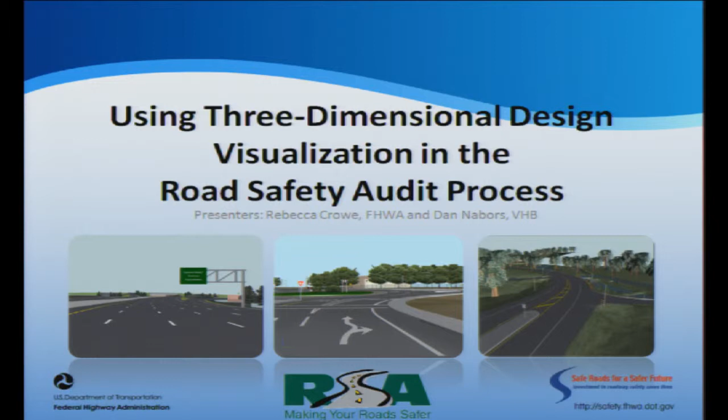So let me tell you what we're going to go over. We're going to talk about the background and purpose of this FHWA-sponsored project, what we mean when we talk about RSAs, and the 3D techniques we used on this project to make it accessible to this multidisciplinary team, which Becky's going to talk about. We'll go through a demonstration of one of the projects, then talk about the different case studies, what was learned, and what were the conclusions.

So now, without further ado, I'll turn it over to Becky, who's going to talk about some of the background information. Becky.

So I've been on vacation for the past week. We went down to Disney World in Florida. I was back one day, and I was talking to my mom. My mom's getting ready to get her Social Security for the first time. She's turning 68, she's so excited. She's like, we've got to go to dinner and celebrate my Social Security check. I said, well, Mom, I can't, I'm getting ready to leave for California. She said, oh, what are you going to be doing out there? So I told her about the presentation, and she chuckled and laughed and said, oh my gosh, I can't believe you're talking about technology. Do you remember blah, blah, blah?

Just to give you a quick story, my mom was really a pioneer in terms of a woman being in programming. Right out of college, she did an internship with IBM, started working for IBM, and eventually owned her own consulting firm working with different agencies in Virginia doing programming work. She was the type of person who had an office in our basement and would program all night - you'd just slide the food underneath the door. She always had long nails. But she just loved it, still loves it - she's still in information technology today.

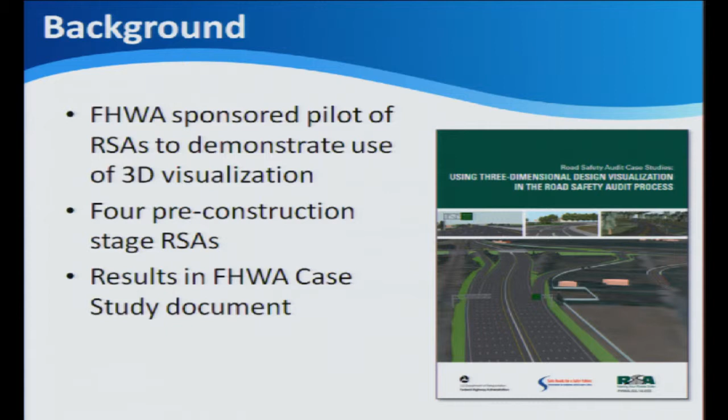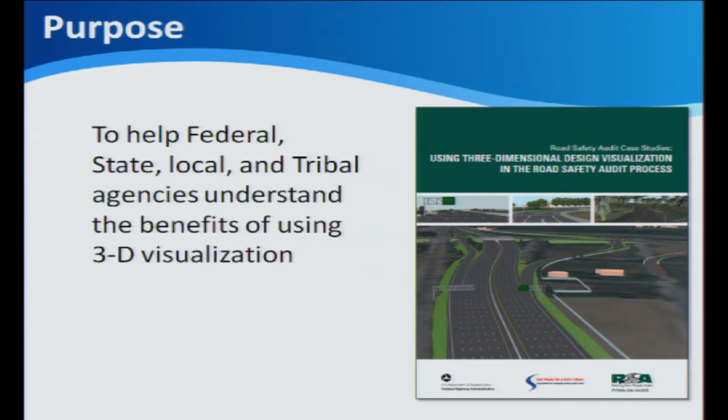And why did we do it? We want to help other agencies, other DOTs, other federal agencies, tribal agencies learn from this. We wanted to capture all of these RSAs, what we learned from using this 3D visualization, with the hopes that they're going to be able to take this technology and use it as well.

Why 3D visualization? You all have heard this, I heard it yesterday a couple times in presentations. In the current transportation legislation, there was some discussion about innovative technologies, Section 1304, 1503, and our Every Day Counts initiative spearheaded by our Administrator Mendez, and our SHRP2 initiative, our research project. They're really pushing state DOTs to look at how they can better use technology to do their work.

So why 3D visualization? I gave you a hint earlier. We want people going out and looking at a design to really understand what's in that design. Sometimes when you're looking at static plan sheets - I'm from Virginia, and we just got finished up on the Woodrow Wilson Bridge, and there's a whole room dedicated to plans, huge rolls of plans. I can't imagine having a team going through those plans and trying to determine the safety of that project. So this is just a tool that we wanted to use to really give us that awareness of safety on a project.

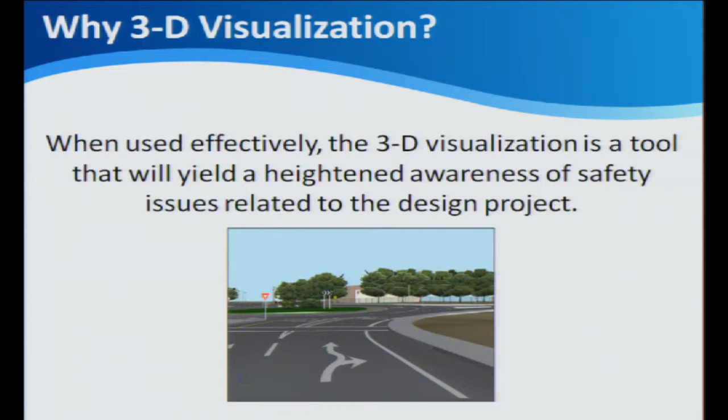So before we get into the glamorous part, I'm sorry, we have to talk about road safety audits. I know the visualization stuff is more fun, but before we go there, look at this picture. How many times have you been riding down the road, you see the blue lights flashing, and then you come up on a crash and see something devastating, like this picture.

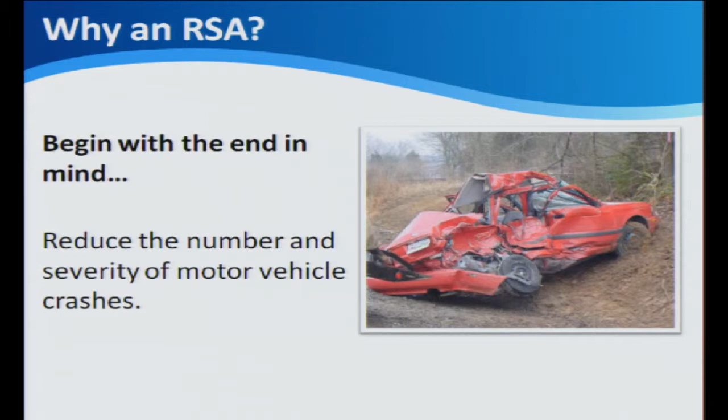Let's begin with the end in mind - we want to reduce these. The saddest crash I've ever seen: we were on our way to the beach, headed down 95, and it was a Tahoe. It looked like it had flipped 4 or 5 times, people had been thrown from the vehicle, and their dog had been thrown from the vehicle. It sticks out in my mind, I'll never forget that. This is why I'm in the business I'm in - I don't want to see that, I don't want to see these crashes on the road. So whatever technology, whatever process we can implement to stop these crashes, I am all for it.

We want independence - people on our team that aren't very familiar with the project, to give us a fresh viewpoint. What do you see when you look at this? A lot of times if you're engaged with that project on a day-to-day basis, you're not going to see things that someone coming in fresh is going to see. So we want that independence, and then we want a multidisciplinary team: law enforcement, because they see what's going on the roadway; someone with a human factors background, who can see things that engineers and planners might not necessarily see; and we want operations folks out there.

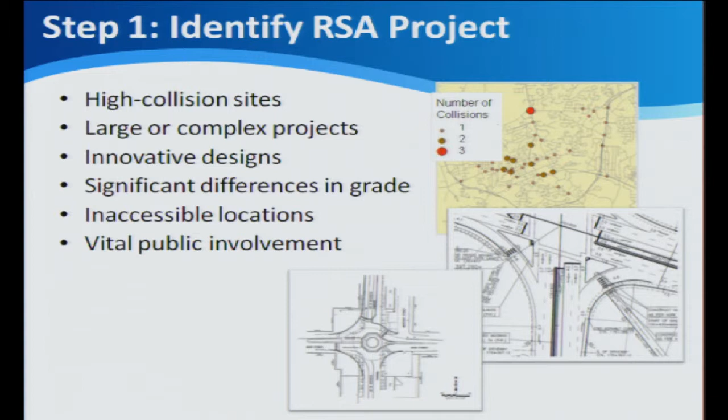So first, you have to identify that RSA project. And as I said earlier, it could be any project. Typically, we like to see maybe a complex design, or maybe a roadway where its function has changed, so there are different things now happening on the roadway. Maybe it's a location that's inaccessible, you can't actually go out and walk it. That might be a great candidate. Or an innovative design—you're going to be hearing about an innovative design later today. So these are the types of projects that we would look for.

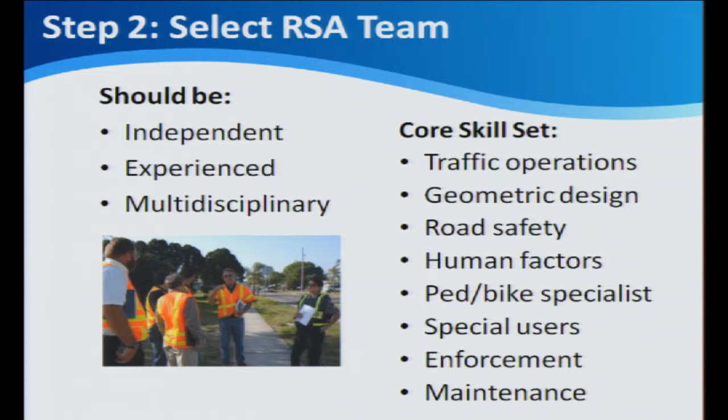And then selecting that RSA team, to me, this is probably the most critical step. I talked a little bit earlier about that multidisciplinary aspect. You want that core skill set to be geometrics, engineering, human factors. You may have an area that has a lot of pedestrians and bicyclists, so you might want that skill set on your team. So it is imperative that you get the right people on your team to actually be reviewing your project.

Step 4, even when it's a design, we want to go out into the field and see what's going on out there. Some of these designs, we weren't making a lot of changes. Some of these were a complete redesign of the roadway. But you want to do the field review. It's extremely important. You want to see the conditions.

You want to see how traffic's moving. It's great to have law enforcement out there with you, especially if it's a very complex design. They're sitting there beside you saying, well, how am I going to pull anybody over on this? Or you've got traffic signals that don't make any sense—I can't go to court and defend this. So they bring a really unique perspective when you're out there on the field.

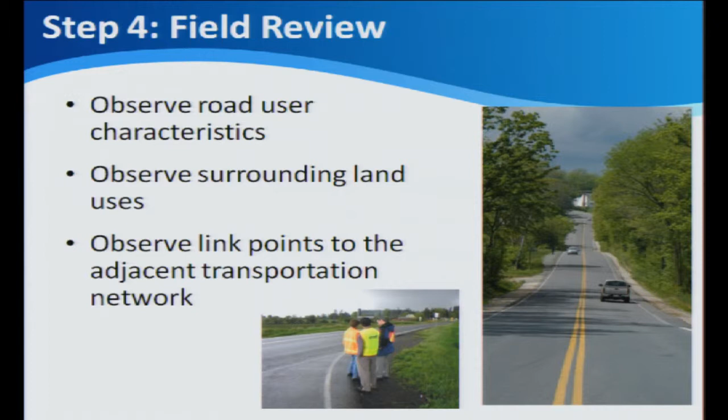And then that step 5, this is really when you're going to start doing your analysis. You're going to be sitting across the table with your team, and you've got all this data in front of you, and you've been out in the field, and this is really when you're going to start working together and talking about, this didn't look right to me, this didn't feel right to me, what do you think about this characteristic of the roadway, how are people gonna really understand what to do. So this is where you're going to start doing that analysis, identifying the issues, prioritizing those, and start to think about what types of countermeasures should we really recommend to make this design safer.

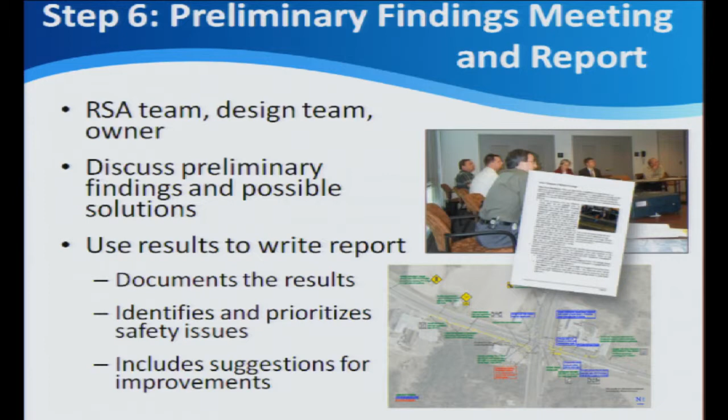And then this step 6, this is where you start writing the report. You've done that analysis, you've come to some consensus of what you'd like to see changed. And like I said earlier, it's formal. You want to actually write a report and get everyone's comments and input. Here's your formal response that you're going to actually be sending to that road owner.

And then finally, the road owner is going to give you that response back as to which of those issues maybe they can move forward with, maybe those issues that they can't move forward with due to funding or other reasons.

And then, this is the final step. We want to see those things incorporated into the design. And on every RSA that I've ever been on, it's amazing how when you have operations folks out there and they see something wrong, they're on the phone immediately. You don't even have to wait till this, your formal response back to the road owner or incorporating.

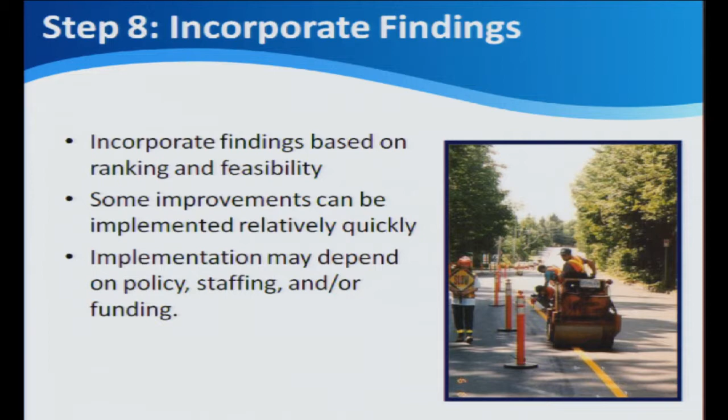They're out there now getting signs changed, cutting brush down from the road to make sight distance better. It's amazing how quickly they work. But that gives you some idea of the 8 steps for an RSA.

I am going to now turn it over to Dan, and he gets to talk about the fun stuff. Thanks, Becky. So this is the fun part. Everybody should be excited, right?

So we're going to talk about the models that we developed for this project. First, I'll start by telling you what we put together. We were developing realistic models that had all the traffic control part of the proposed change, pavement markings, lane configurations. You could see all the attributes on the road and the roadside to give it a realistic feel.

The purpose of this was to be able to drive down the roadway and look at what it might look like if it was a completed project, to give this multidisciplinary team that sense of completion. It makes it easier for them to identify some of the challenges or potential things that might be of concern from a safety standpoint.

The other important point was that we put this in a format that was easily accessible, because we had these multidisciplinary teams and not everybody was well-versed in engineering drawings, shop drawings, or technical aspects of design. So we wanted to put this in PDF format, since the PDF software is available for free. We could send this to them or put it on a website so they could download it themselves and look through the different designs prior to going into the meeting.

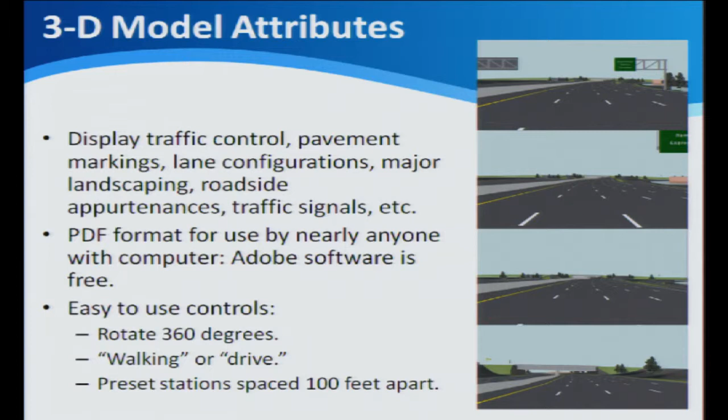And then finally, the last control feature was that we did this so we had preset stations, the stationing for the project. We followed that stationing so they could click directly to different stations if they wanted to look at a specific area. I'll demonstrate that for you in a few minutes.

So how did we put this information together? Well, first is displaying the information, really breaking it out, where we took the digital terrain models or 3D contours, if that's what we had, to really make the surfaces smooth and connected so we'd have separate layers for different surfaces for the road, the roadside, and different things, so they could be displayed and overlaid with different surface materials.

Next, we created 3D objects outside of our design software package, usually done in SketchUp or something similar. We created those and imported them into the design software and placed them in the appropriate location according to the design.

Then, after looking at the information we displayed, we would create the surface materials for the road, the grass, and different things like that. Then we set these 100-foot view locations — that's basically what we did. Finally, we would take that and create a 3D PDF from that design software. We usually used MicroStation for putting this all together.

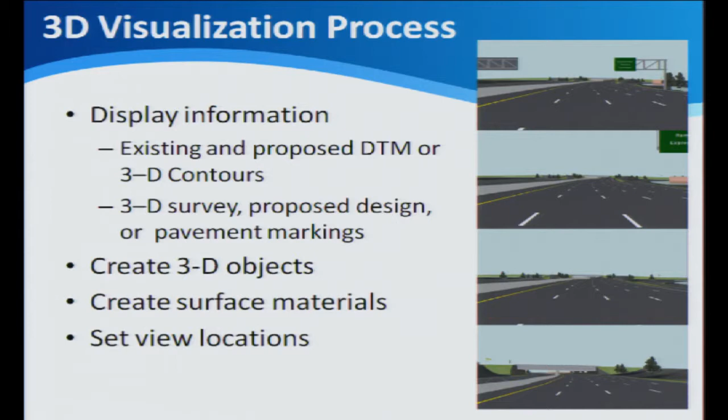So what does that look like? Now I'm going to show you one example of one of the roads we looked at. This is a case study in Virginia, and we'll go through this in more detail, but I want to show you how it works. We had these models developed with preset stations marked out, so you could click through and it simulates driving. You could also drive through using the mouse or the cursor.

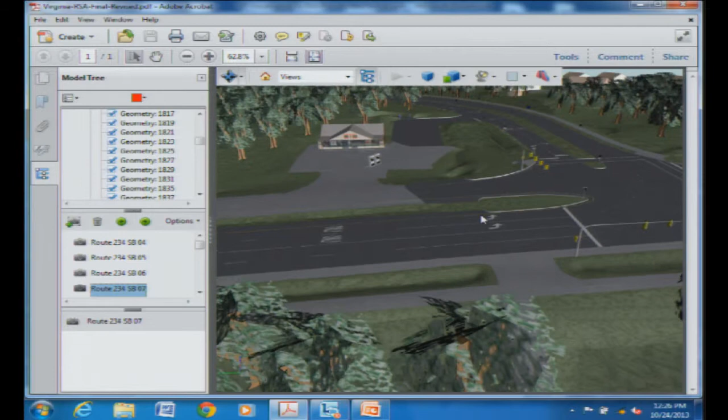You can also rotate, as you see, to look at things isometrically, getting a bird's eye view. You can zoom in there too, and you can see there's quite a bit of detail in a lot of these things.

Everybody recognize this? I know we're not putting a plug for a special convenience store or anything, but you might be able to recognize that as a 7-Eleven.

So we'd have some realistic features here, and part of having the realism is to get buy-in from people who are going to be reviewing the model and evaluating the safety aspects.

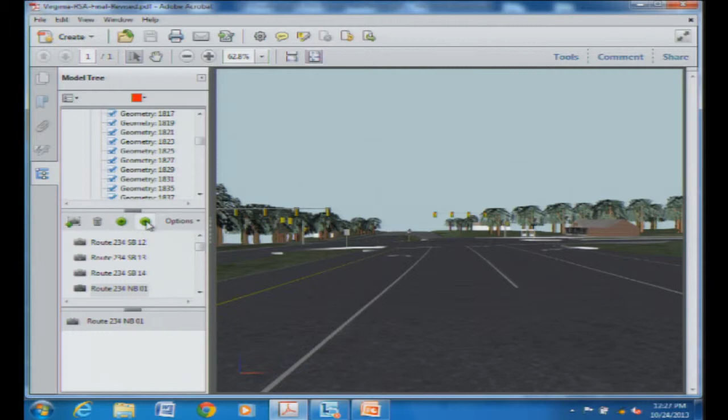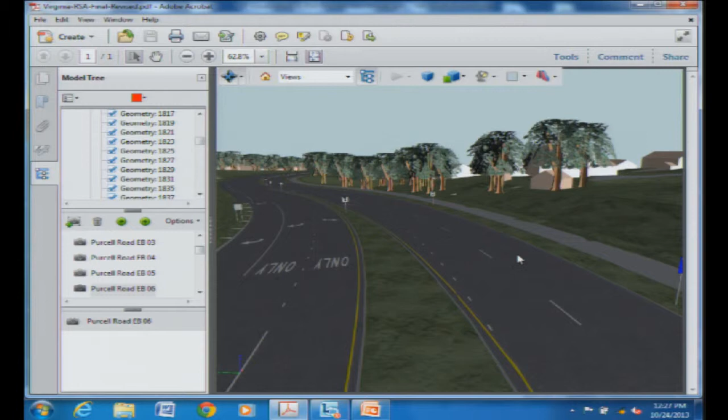This particular one of the concerns, which I'll talk about in more detail, was this new roadway, basically a widening and realignment. One concern was the impacts on this neighboring community. This really demonstrated to the public what the final design would look like and how that would affect their community.

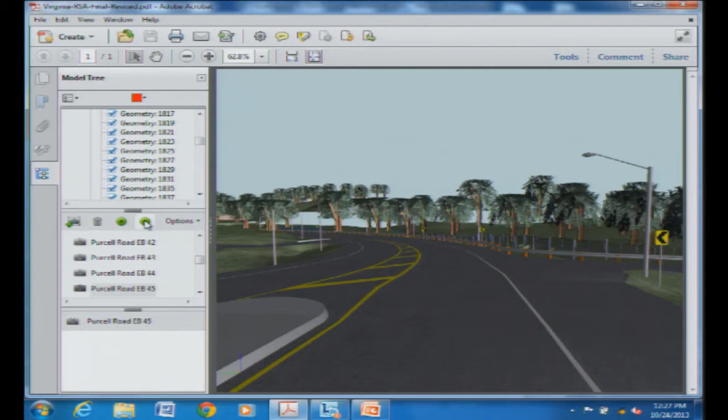But you can see signs are also displayed there, so we have the signing and marking plans put into the models—a pretty realistic depiction of what we're looking at. You see lighting through here, fences, and we also have retainment ponds for runoff. So again, we're depicting every single feature that's out on the roadway in a realistic fashion.

I'll just click through, going in each direction. By having these preset stations, it goes one direction and the other, so you can kind of see where you are, and you can click to it by just clicking on this menu off to the left. So that tells you exactly where we are.

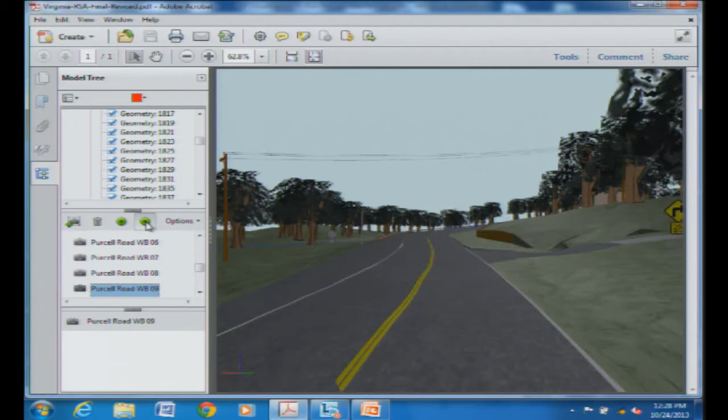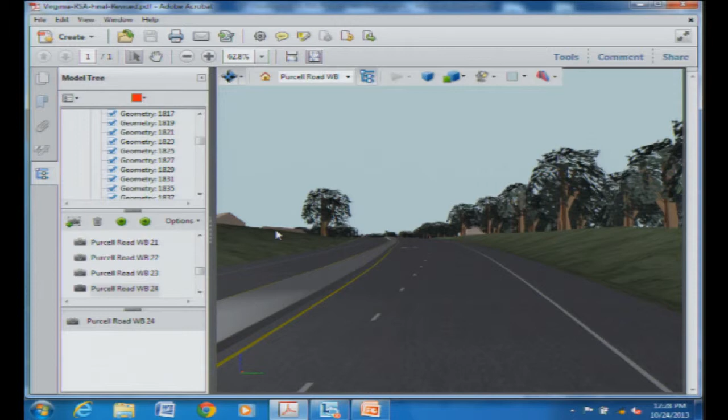But you can also see where the new and old roadway alignment difference is. When you have that fresh repaving, you get that darker asphalt color—that's in there too. And you can see retaining walls that were needed for the widening. That's all depicted, so it's pretty real. People bought into this because it depicted conditions they could expect if the project were complete.

All right, so let's continue talking about some of the case studies and how this was utilized. There are 4 case studies I'm going to go through, and we'll talk about some of the different benefits that the 3D model realized from each of these. The first one is Defense Highway, Burma Road in Middletown, Rhode Island, which Becky had referred to as well.

The planned improvements here are for a two-lane new facility that goes through a Navy base. Because of that, it's closed to the public, so we didn't have access to the area where the roadway was going to be proposed. This was a preliminary concept, so we didn't have a lot of detailed information available—no site survey or anything where we could develop digital terrain models.

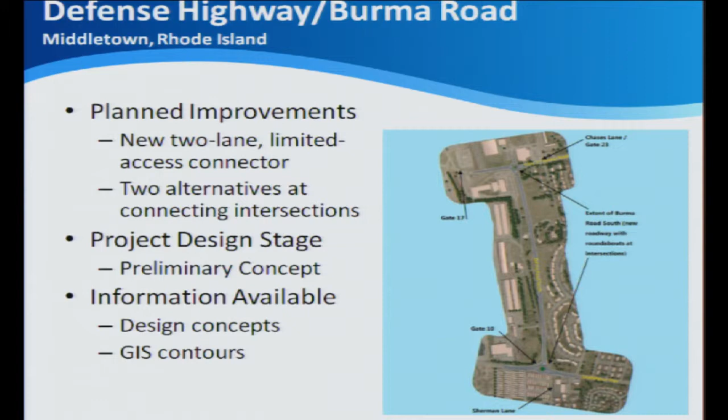So we had to use the state's GIS contour file to create that 3D element. As you can see, we overlaid the 3D model—you can see the extents in this aerial view from this roundabout to that roundabout—on a map of the base using the GIS contours and existing aerial photography. We only looked at one section, and within that section there were actually a couple design alternatives for some of the intersections, which I'll talk about more. But this one section was just the part on the base that we didn't have access to.

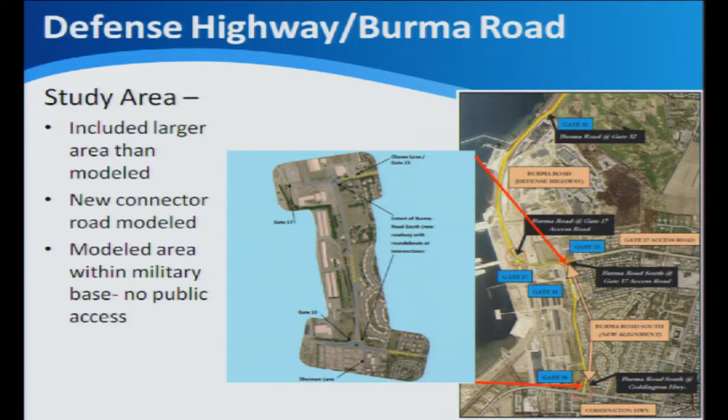The RSA was much larger, and it was interesting because it gave us a basis to compare—looking at the model, using the model, versus the area where we didn't use the model. But in this case, it was a necessity to use that model because we didn't really have access.

So what were some of the benefits of using that on this facility? Well, one was just having that visualization of what the road would look like on that base. That was important because of the impacts to the base—they were going through a partial base closure, and they wanted to know, if they turned this section over to the public as a public road, what would be the impacts to their land and their operations, including the different gates they have going in and out of the base.

It enabled comparison of those impacts. Like I mentioned, we had two design concepts. On the left you can see a visualization of having that connector road terminate at two signalized intersections. The other concept was having it terminate in two roundabout designs.

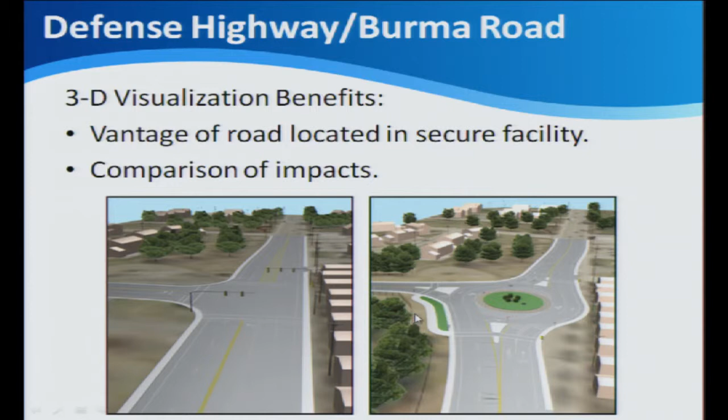By having this detailed 3D visualization, you could see not only from a plan view, but from a real-world 3D view what the impacts were to this housing area, in all quadrants, and also some of the trees used to help shield the developments and the base itself. You can see the fence depicted on this view with the roundabout as well. So what were the impacts to the base?

Some of the other things were visualizations of concepts that were pretty unfamiliar to a lot of people in this area, particularly with regard to being so close to a naval base. One of those was the use of roundabouts.

In these two bottom photos you get a nice isometric view on the bottom left, but then we were able to drive through that roundabout and show some of the key attributes that would be an added safety benefit. The specific attribute we're trying to demonstrate is deflection through a roundabout, which helps slow down vehicles. Speeds were a big concern here, so that roundabout idea was seen as a good benefit because it would address that specific issue.

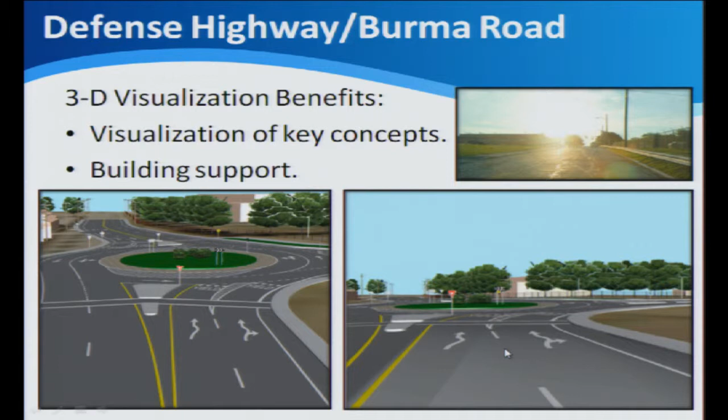Here's a photo of driving down the existing road, and you see the sun comes up right along that roadway. One benefit of roundabouts, which you could really visualize through this 3D model, is that you have your pavement markings on the road. If this were a signal, you'd have difficulty seeing the indications due to the sun coming up at that time. By demonstrating the 3D model on the roundabout, you're looking down on the road and you have your pavement markings there, so you're less likely to be confused coming into that intersection. It really brought some of those things to life.

Ultimately, Rhode Island DOT developed a policy through other connecting corridors of putting in these roundabouts in pairs to form this dog bone formation, with two roundabouts that help slow down vehicles, but also help with vehicle access. If you have access points between the two roundabouts, you can put in medians, which provides an opportunity for an access management plan.

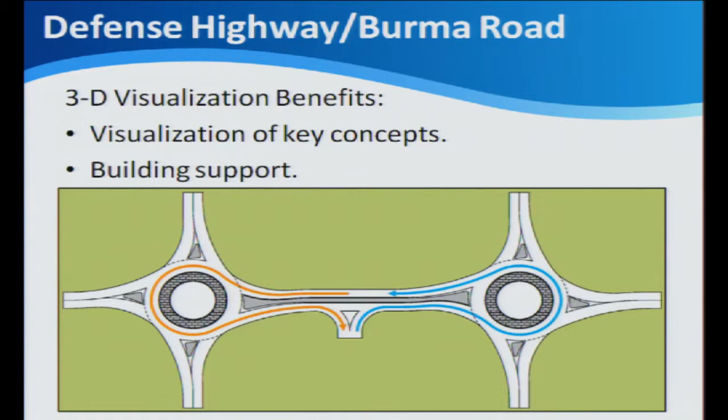Building support through being able to clearly demonstrate these models was one of the key benefits. By doing that in 3D PDF format, it was very easy to transfer to multiple stakeholders, which we have on a lot of these projects.

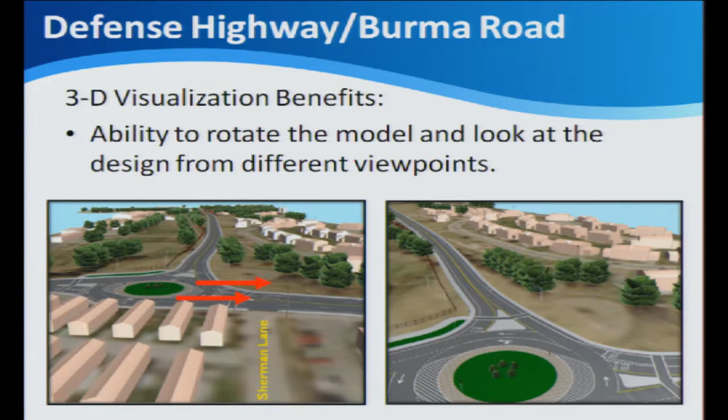Looking at things from that isometric view just gives you better vision and clarity of some of the impacts. Through that, a design recommendation was made to move this roundabout to this side street to make a 4-leg roundabout rather than keeping it where it was originally proposed. Again, this really helps clarify the impacts of different decisions with a specific design.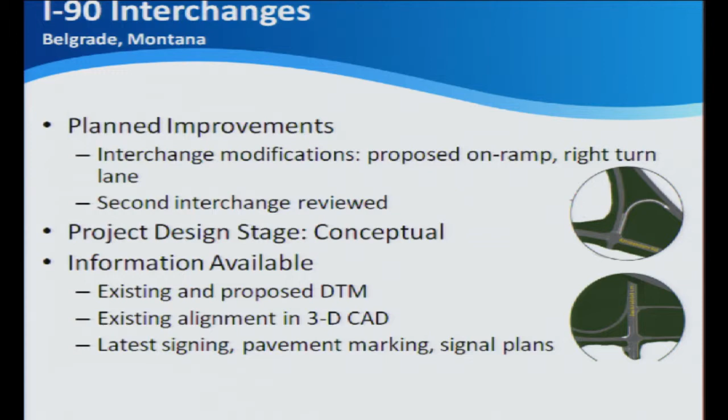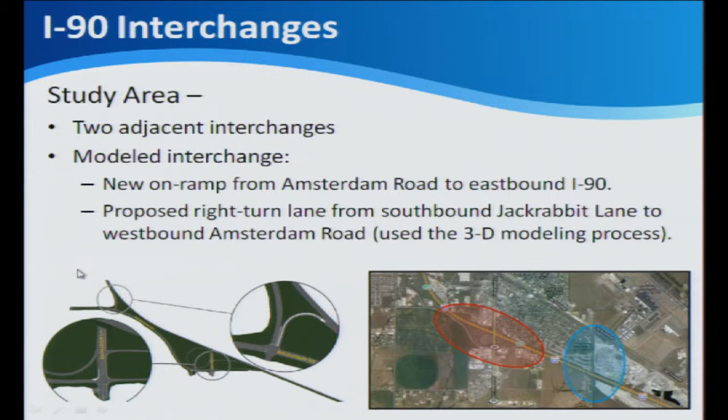This one was further along in terms of design stage—this is conceptual instead of preliminary design like the other one. So we had existing and proposed digital terrain models of the surface, the design in 3D CAD, and the latest signing and pavement markings. We looked at 2 interchanges, but this one circled in red is the one we looked at, and you can see this is a blow-up of a couple of the features there.

So what were some of the benefits of looking at this using 3D visualization at this interchange project? Well, one is to evaluate the impacts that really weren't thought of until that 3D model was developed. One of those is utility impacts—utilities, lighting, how are those going to be impacted by the new design?

On your left, you can see the existing design, and on your right, the proposed design, and you can see some of the utility poles that it would impact.

The other thing is, by actually designing this in the 3D model, putting it into an actual design, we were able to see what were some of the constraints with that proposed design. For instance, this new on-ramp you see here—this is like the arterial street, and this is the on-ramp to I-90.

By putting that into a design to make this 3D model, we looked at what is the radius of this, and what is the corresponding speed given that radius. The speed of this ramp would be 25 miles an hour, meaning you'd need a much longer acceleration lane. There's an immediate impact from doing this in 3D design that we were able to clarify.

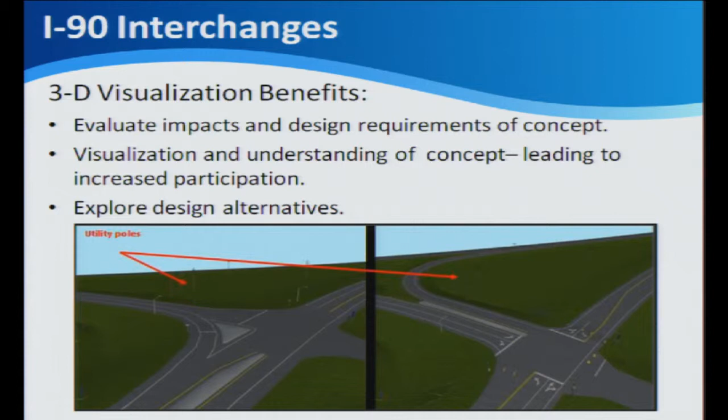That led to a better understanding of how these elements come together. Again, this is the visualization and understanding Becky talked about. It led to better participation, which was especially critical because we had several design alternatives. I focused on two, but we had many options we considered. By being able to visualize them, we could compare those and come up with advantages and disadvantages of each that we wouldn't have been able to determine without that kind of 3-dimensional design.

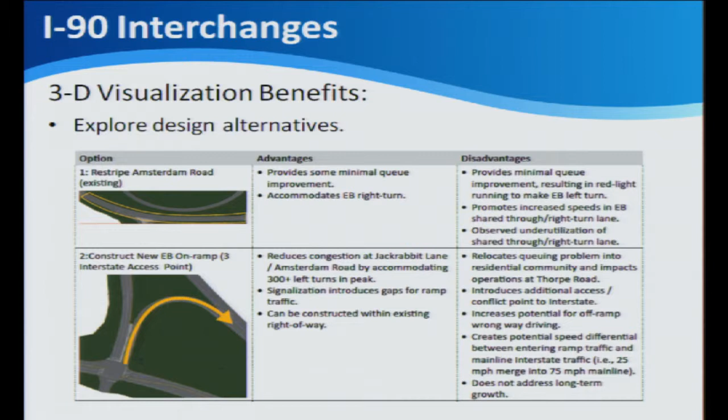So here's just two, but we actually came up with seven. I'm not going to go through all of them, but you can see that was a real benefit—we could get more clarity as to what were the impacts of the different alternatives.

Also, looking at thorough understanding of impacts—not just from a design perspective, like that curve on the on-ramp, but also operational impacts—it helped provide understanding.

You can see on the left a photo of the existing road, and then we talked about that proposed right turn lane. This is the new proposed road with that right turn lane, but what was happening here is you had a long queue of right-turning vehicles in the condition without a right turn lane, and that was creating sight distance problems, as you can see with this truck coming out there, and there were collisions associated with that.

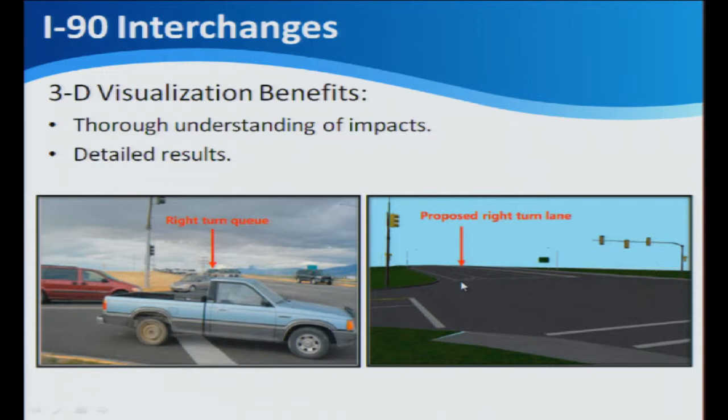So we were able to assess those impacts by looking at how that design was changed, and make recommendations to address some of the things that weren't addressed through that initial design.

Okay, the third project was very different than the other two—this was the model I showed you and ran through quickly. This is a roadway widening and a horizontal and vertical alignment of a road next to a community, this neighborhood. Part of it was widening up to that community to provide them more access.

It's a little bit bigger. This just shows one of the roads closest to the widening that would be impacted the most, and then a realignment of the roadway in this section where there's significant horizontal and vertical curvature.

This project was in the 90% design stage—nearly complete. There had already been an environmental assessment done and approval. So we could model things more precisely, but there was also a little less flexibility to make changes without completely disrupting the whole process.

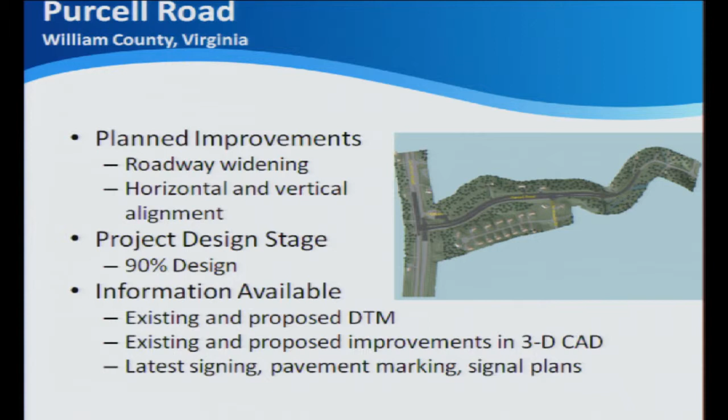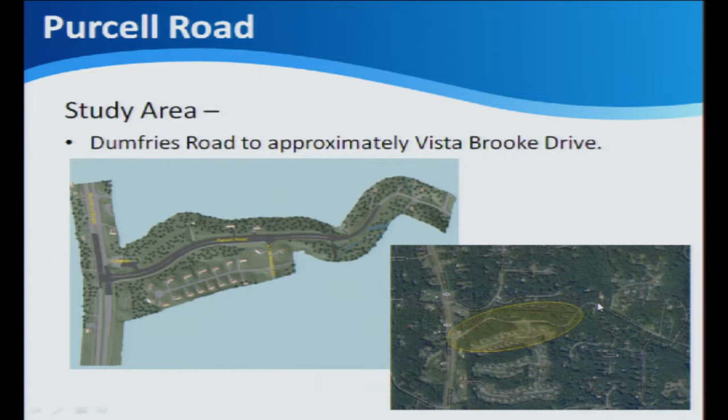Well, we were able to make significant recommendations based off what we were provided. This just shows how realistic the model is compared to an aerial photograph right there.

One of the things was to provide a thorough understanding of the impacts to stakeholders, because the community and other people had for a long time been pushing back on this project, feeling it was going to completely disrupt their community. We were able to have this realistic depiction of the conditions, which built confidence, and people were more accepting of the potential impacts of this project.

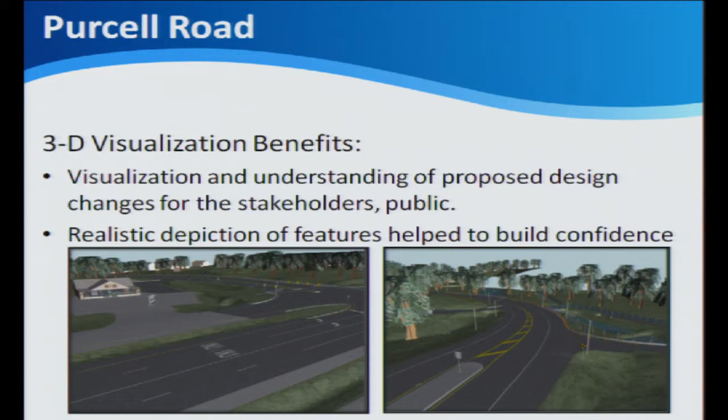The other thing we did with the model: I showed you the run-through of the actual model before, and we did a taping of that so we could put it on a computer at a public meeting. It just ran so people could watch it without somebody having to actually drive or work the controls. That was another neat aspect, made very easy by having it in that PDF format.

Another thing is that ability to drive through really provided a clear understanding of some potential impacts. This is looking west as you're coming up to that intersection, and you can see it's 3 lanes there, which is different from the condition now, which is only 1 lane, except right at the intersection where there's a left turn lane.

But this right turn lane, if you look at it, there's some elevation here, and you can barely see that convenience store in this corner. So if you're going on this road, this right turn might look like the turn into that intersection, but it's not, it's the right turn into the 7-Eleven. Having that clarity, seeing it from the driver's perspective, helped identify these issues so we could address them before they were actually put into the ground.

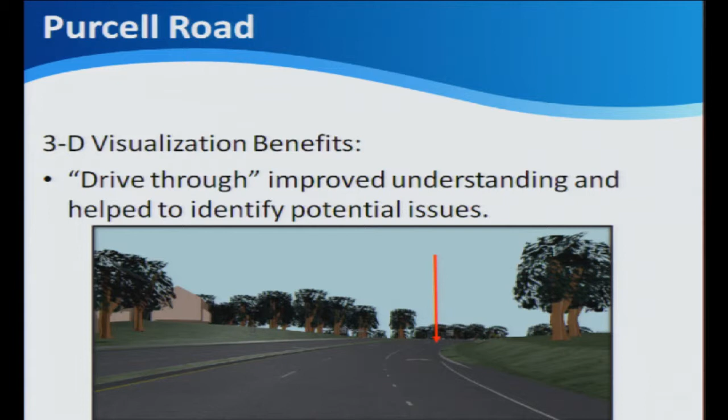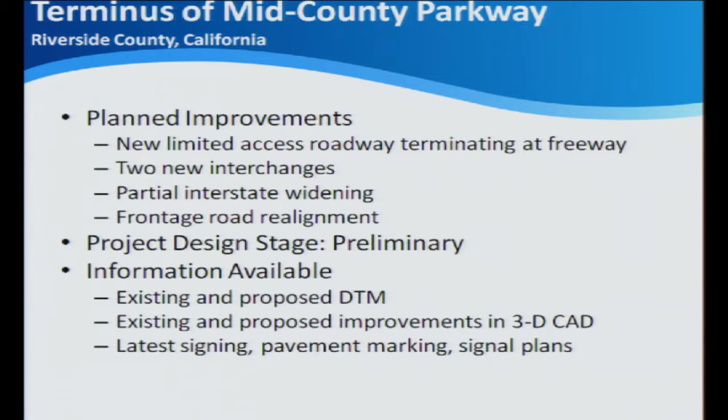Our last project is probably the most complex of all. This is basically a junction of a new freeway and an interstate, creating 2 new interchanges, partial interstate widening, and significant realignment of frontage roads along the existing interstate. This is a preliminary design, so we had survey data, digital terrain models and 3D CAD, probably at about the 40% stage, but there was still some flexibility to do things within the right-of-way.

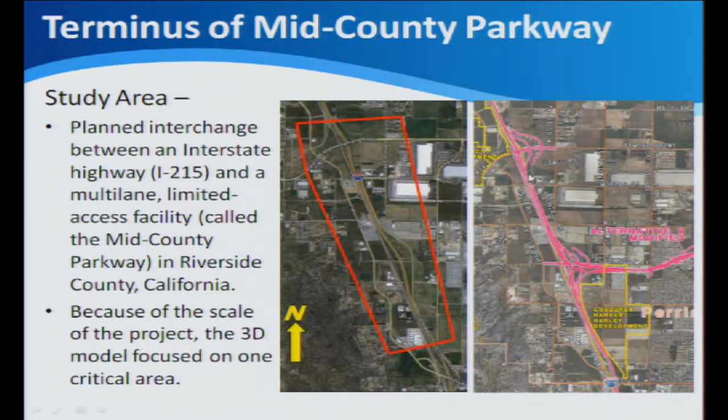This is an aerial view of the entire modeled area. These purple roads are the new Mid-County Parkway, which would create this new interchange, and because of the realignment of other roadways, it would create another new interchange here, or a modification making it a more elaborate interchange. With such significant changes, the 3D visualization helped in several ways.

We were able to look at the impacts of the different bridge piers, abutments, barriers, and the sight distance problems they would cause, plus the location of proposed signage. We could see things immediately that needed to be addressed in the design. The other thing, and I'll try to explain this, is this old frontage road here.

This grayed-out area is the old frontage road, and the new proposed design in red moves this as an off-ramp, with the old frontage road shifting east a bit. So from the 3D model perspective, you're driving down this roadway and still seeing your old intersection almost straight ahead of you. Recognizing these impacts, and considering the familiarity some drivers might have and how they might be affected by these significant changes, was really clarified through use of this 3D model, and we could come up with measures to address them.

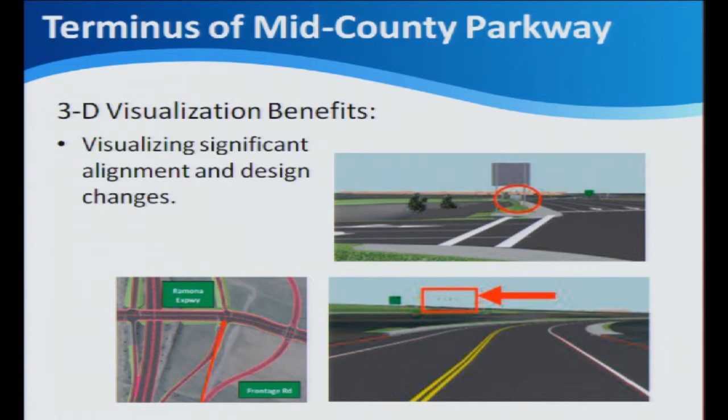I think one surprise was that the basic footprint of this conceptual design was already created, and one thing that hadn't been done was the signage plan. You usually think of the signage plan as something that comes afterwards, but since this is such a complex interchange, we came up with a preliminary signage plan as part of this RSA.

By doing that, we realized we would need some significant signs requiring overhead signage, and overhead signs have barrier requirements, which require a grading change. So we realized it comes back to the initial design, where you're going to have to make grading changes in that alignment in order to put in the signs really needed to help people navigate this new complex interchange. That was something maybe not expected from doing this RSA: that the signs would come back to grading.

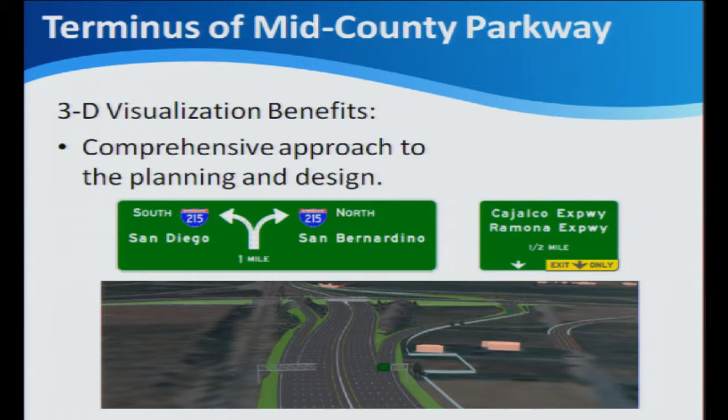What we were able to realize is that having a more holistic approach, doing things together, was really needed. Based off of the findings, they went back and figured out the signage plan, which resulted in some grading changes and some small alignment changes to shoulders and other parts of the roadway, which wasn't really anticipated going in, but was seen as a benefit from using that model.

So all in all, some of the benefits we saw from using this 3D visualization are comprehension of design plans. We had teams put together, including law enforcement and other people critical to this process who aren't familiar with looking at a flat set of plans.

They were able to provide really good creative input by seeing the roadway from this driver's perspective. Law enforcement is familiar with things they enforce on the roadway and problems they see, and they could see how those would translate in this context.

Looking at the proposed features was another benefit, having a thorough understanding of those. When we're talking about median islands, roundabouts, or pavement markings, this provided a realistic context so people would understand, okay, this makes sense to me, or should we be doing something different?

It provided visual support that different participants in the RSA process could use, from the owners to different stakeholders, so their concerns could be addressed up front. The design would even be better if we're addressing stakeholders' concerns up front, rather than waiting later when it would require significant changes to the project schedule. You can do this earlier and keep things on track.

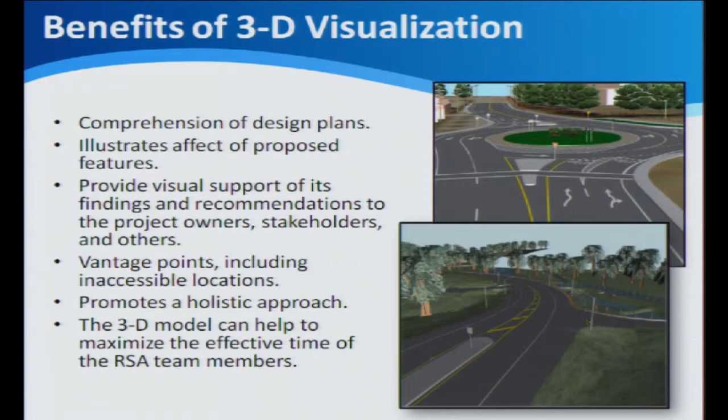What's probably really important too is when we pull together these teams, we have a team of experts providing very focused input. We're getting this expertise for a short amount of time, and this really helps ensure we're maximizing that expertise, because they're able to provide the most thorough input, having the most efficient and quickest understanding of what is going on or what's being proposed through a certain design.

So with that, maybe we'll hold questions to the end. Okay, are there any questions?

When you say existing, do you mean survey data, or is it just an as-built type of CAD model? Yeah, it's - we took, some of it was, we would use both.

We would have to bring it into some design software and actually create the DTM based on that. But we took just survey data sometimes and created the digital terrain models.

Okay, well first, I think this is a great approach, and a great use of 3D visualization. Would you be receptive to some suggestions? Sure. Like the DTMs, there's the JPL lab, very close to here.

They manage a Terra satellite project, and under that project there's a sensor called ASTER. It was put together by NASA and the Japanese Space Agency, and they've done DTMs for about 80% of the world - and it's all free. You can go to the JPL website and download the DTMs.

Another thing I was looking at is our vehicles now have LiDAR, grade, and photo logs all integrated. We try to port them right into a workspace that's 3D.